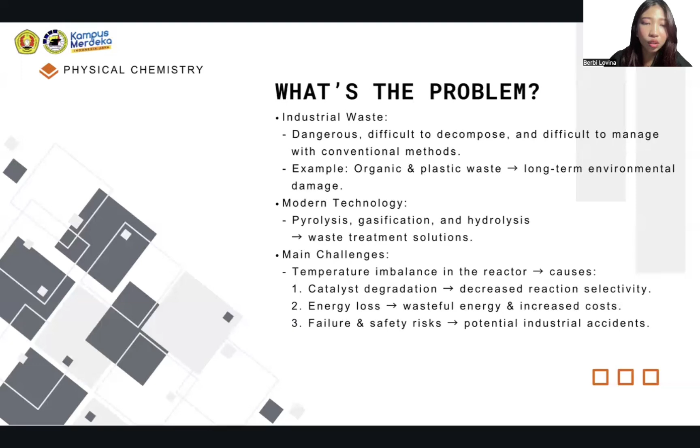So, what's the solution for this reason? A solution is needed that can not only maintain a sustainable temperature in the reactor, but also improve thermal efficiency and overall safety. The integrated thermal equilibrium tank reactor is an innovative solution designed to solve this problem. ITER combines smart material technology, IoT-based sensors, and thermal nanofluid to achieve thermal equilibrium actively and dynamically throughout the process. This system enables even heat distribution throughout the reactor tank, reducing the risk of hotspots, improving energy efficiency, and extending catalyst life.

In addition, ITER is also designed to adapt to various types of industrial processes, from plastic waste treatment to biomass, making it a flexible solution for waste treatment in various industrial sectors. By utilizing the concept of thermal equilibrium, ITER has the potential to revolutionize industrial waste treatment and introduce more sustainable and efficient processes in reducing the environmental impact of industrial waste.

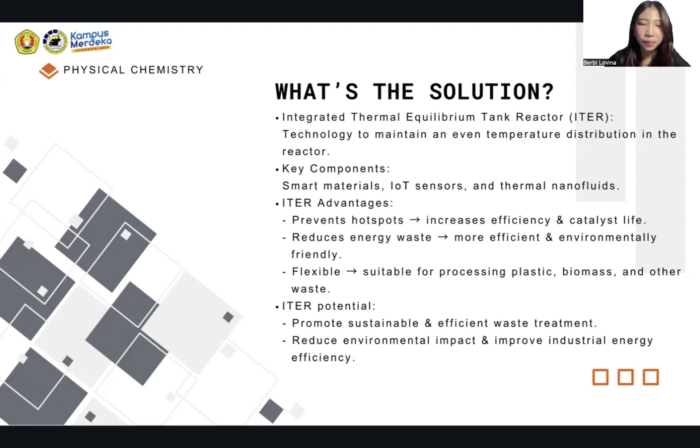Okay, next, the second chapter is technological revolution in waste treatment and temperature management.

Industrial waste treatment is an important process in maintaining environmental sustainability and preventing ecosystem pollution. Industrial waste can be categorized as solid, liquid, and gaseous waste generated from various sectors such as manufacturing, textile, plastic, and biomass. Along with industrial development, waste treatment technology continues to evolve to improve process efficiency and reduce negative impact on the environment.

Industrial waste treatment is an important process in maintaining environmental sustainability and preventing ecosystem pollution. Industrial waste can be categorized as liquid, solid, and gaseous waste generated from various sectors such as manufacturing, textile, plastic, and biomass. Along with industrial development, waste treatment technology continues to evolve to improve process efficiency and reduce negative impact on the environment. The main waste treatment technologies used involve pyrolysis, gasification, and hydrolysis.

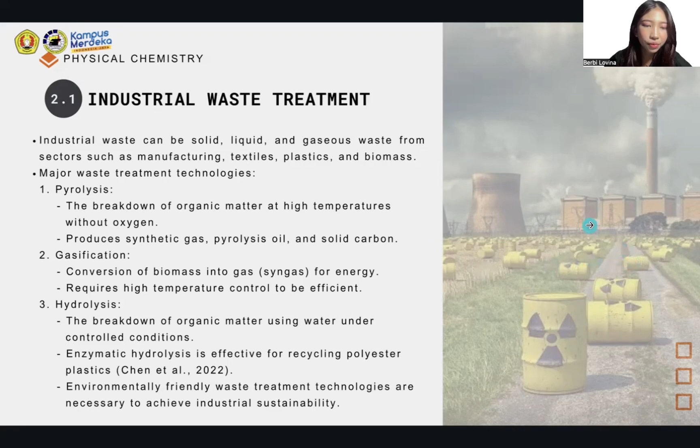Next, thermal equilibrium in chemical reactors. Thermal equilibrium in a chemical reactor is that in which the temperature distribution throughout the reactor system is uniform. Temperature imbalance, which often results in hotspots, can cause major problems such as energy wastage, catalyst degradation, and formation of unwanted byproducts.

Energy waste occurs when temperature imbalance results in inefficient use of energy to maintain the optimal temperature in the reaction process. Catalyst degradation, especially for temperature-sensitive catalysts, can impair reactor performance, decrease reaction efficiency, and increase maintenance costs. In addition, thermal imbalance can increase the risk of dangerous byproduct formation, such as solid carbon or toxic gases.

To address this challenge, smart material technology and sensor-based temperature control systems have been developed. Smart materials such as phase-change materials, or PCMs, are able to absorb and release heat efficiently, maintaining temperature stability in the reactor, while sensor-based temperature control systems allow for more even heat distribution, improving efficiency and temperature stability in chemical reactors.

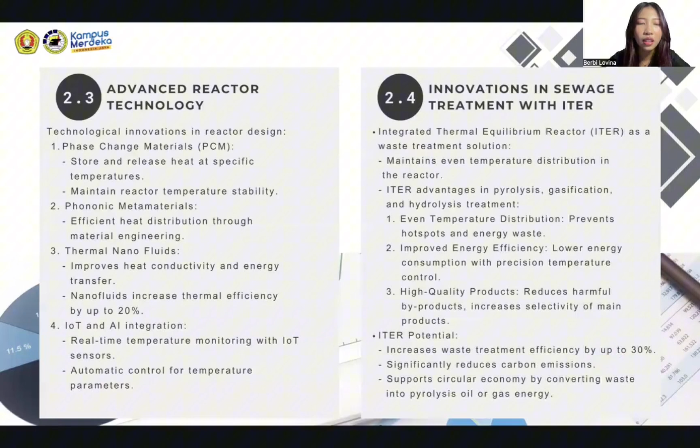In pyrolysis, gasification, and hydrolysis processes, ITER offers several significant advantages. These include even temperature distribution and high quality product output by minimizing the formation of harmful byproducts. With this innovation, ITER has the potential to reduce the environmental impact of industrial waste and help support industrial sustainability through more efficient and environmentally friendly processes.

Okay, the next chapter is ITER design and technology. The first basic concept of ITER.

ITER is a technology developed to address the challenge of temperature imbalance in chemical reactors, which often hamper process efficiency. ITER works to keep the temperature in the reactor uniform and stable, which is an important factor in improving the efficiency of industrial waste treatment.

To achieve this, ITER incorporates a variety of advanced components, including phase change material or PCM, aerogel, and thermal nanofluid. PCM plays a role in absorbing and releasing heat as the material undergoes a phase change, which enables temperature stabilization in the reactor. Meanwhile, aerogel is used for thermal insulation, reducing heat loss and improving heat distribution efficiency in the reactor system.

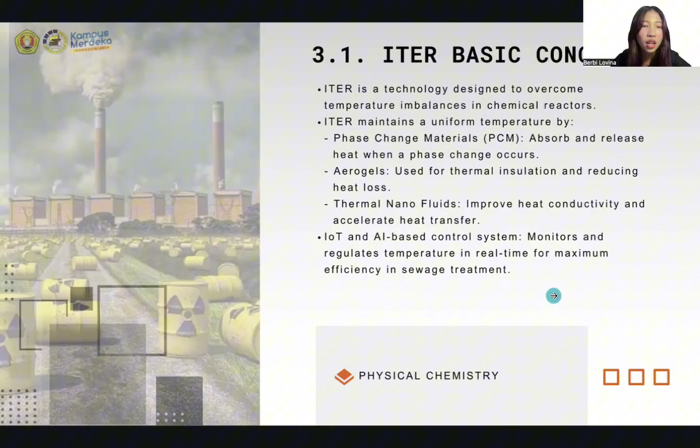In addition, ITER is equipped with an IoT and AI-based control system, which monitors and regulates temperature in real time for maximum efficiency in every waste treatment process.

Okay, the next main components of ITER. First, phase change material or PCM. PCM is used in ITER to absorb or release heat at a specific temperature, which helps keep the temperature stable in the reactor. While this material changes phase, either from solid to liquid or vice versa, thermal energy is absorbed or released, allowing temperature stabilization in the system.

Proper selection of the PCM is critical to the effectiveness of this system, as it must have a high energy storage capacity and can sustain temperatures suitable for the process being carried out.

And next, aerogel-based insulating material and phononic metamaterial. Aerogel is known as a material with excellent thermal insulation, which is used in ITER to reduce heat loss and improve heat distribution efficiency in the reactor. With very low thermal conductivity, aerogel helps keep the internal temperature of the reactor stable and controlled.

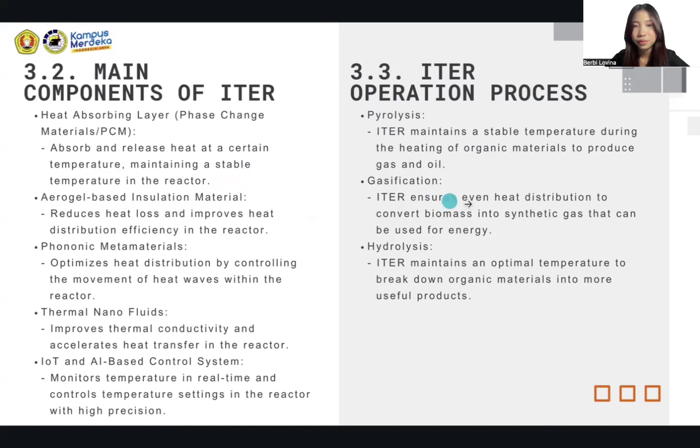And fourth, equations relating to industrial waste treatment using advanced reactor technology. In industrial waste treatment using advanced reactor technology, several physical and chemical formulas can be applied to ensure the efficiency and sustainability of the process.

One of these is Fourier's law for heat conduction, which describes the flow of heat through material in the reactor. This formula explains how heat flows based on temperature difference, material conductivity, and material thickness, which is critical in temperature management in the reactor for processes such as pyrolysis and gasification.

The formula is q equal minus k times A times dT divided dx. Q is heat flow rate, indicating how much heat flows through the material per unit time. K is thermal conductivity of the material, indicating the ability of the material to conduct heat. The minus sign indicates the direction of heat flow, namely from hotter areas to colder areas. A is the surface area exposed to heat flow, determining how much area is used to produce heat. And dt divided dx is the temperature gradient, the change in temperature per unit length along the material.

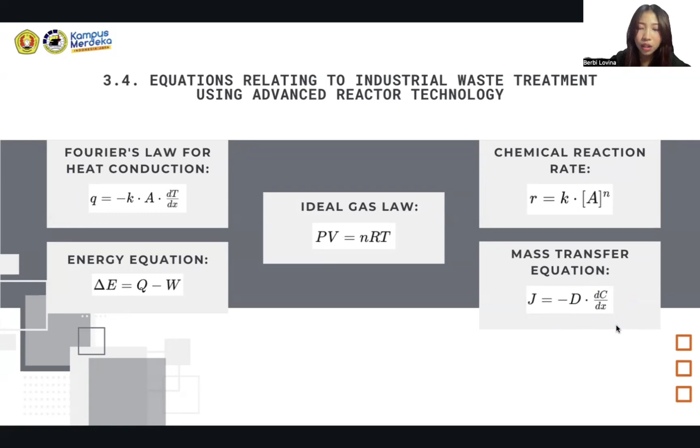And last, in the enzymatic hydrolysis process, which is used for recycling polyester plastic, the mass transfer equation can be used to model how chemicals such as water or enzymes move through the medium in the reactor. This mass flux plays an important role in determining the efficiency of the process and the speed of conversion of waste material into more useful product. All of these formulas work together to improve the efficiency and effectiveness of the sewage treatment process, while managing energy usage and temperature in the reactor. The formula is J equal minus D times dC divided dx. J is mass flux, which is the rate of mass flow through a unit area per unit time. D is the diffusion coefficient, showing how fast a substance moves or spreads in a medium. And dc divided dx is the concentration gradient, which is the change in concentration of a substance per unit length in the direction of flow.

Chapter 4 is advantages and applications of ITER.

The first advantage of ITER in industrial waste treatment: ITER, or integrated thermal equilibrium reactor, has a number of advantages that make it a revolutionary technology in industrial waste treatment. Some of the key advantages of ITER include, first, energy efficiency. ITER is designed to reduce energy waste by keeping the temperature in the reactor stable and even. With better temperature distribution, the system optimizes energy conversion, making the waste treatment process more efficient overall.

Second, byproduct reduction. One of the major challenges in industrial waste treatment is the formation of unwanted byproducts. ITER helps address this issue by precisely regulating the temperature, thereby reducing the formation of toxic gases or other dangerous waste, as well as increasing the quality of the main product produced.

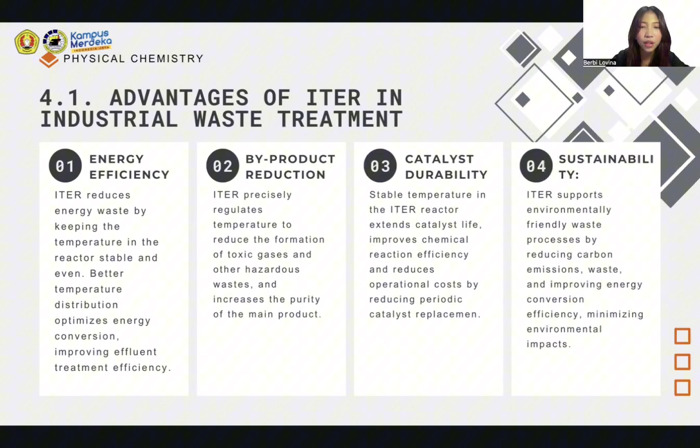Third, catalyst durability. Stable temperature in the ITER reactor can extend the life of the catalyst, which serves to accelerate chemical reactions and degrade over time. Better catalyst durability improves reaction efficiency and reduces the need for periodic catalyst replacement, which in turn reduces operation cost and waste. Lastly, sustainability. ITER supports greener waste treatment by reducing carbon emissions and the amount of waste generated. It contributes to a more sustainable industry by minimizing environmental impact through energy recovery and improved energy conversion efficiency.

4.2 ITER application in various industry. ITER can be applied in various industry sectors, providing more efficient and environmentally friendly solutions. Some of ITER's main applications include, first, plastic waste processing or pyrolysis. In the plastic pyrolysis process, ITER maintains the optimal temperature for the decomposition of plastic into higher quality products such as synthetic gas and processed oil. With more efficient temperature distribution, ITER produces energy and products with fewer unwanted byproducts.

Second, biomass gasification for energy production. ITER is used in biomass gasification, a process that converts biomass into synthetic gas or syngas, which can be used to produce renewable energy, with a precise temperature control system. ITER can improve the efficiency of renewable energy production by reducing energy waste and greenhouse gas emissions.

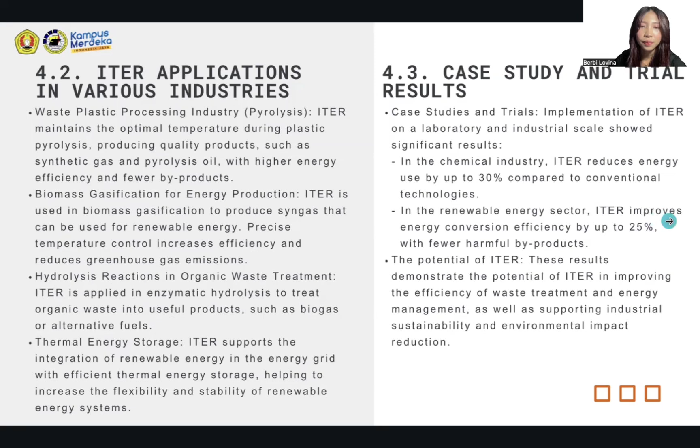Chapter 5 is ITER challenges and implementation. 5.1 Challenges in ITER implementation. While ITER offers great benefits, its implementation faces some major challenges. One of them is the cost of the advanced materials needed to build ITER, such as superconductors, which are very expensive. This leads to high construction and operation costs.

Another challenge is the complexity of the system that needs to be integrated with existing industrial processes. The complex system in ITER must be designed to be compatible with existing infrastructure, which requires careful engineering and special attention to reliability and efficiency. In addition, ITER also requires further research to test and validate the performance under real industry conditions, especially to test the durability of the materials and their effectiveness in waste treatment.

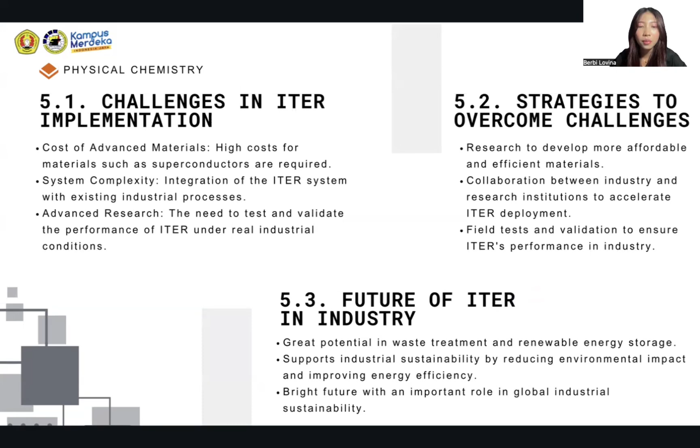And 5.3 Future of ITER in industry. The future of ITER is bright, especially with its potential to be applied in various industry sectors. ITER has great potential for more efficient waste treatment and renewable energy storage. It will also play an important role in supporting industrial sustainability by reducing carbon emissions and improving energy efficiency. In the long run, ITER could be the technology that changes the way industry manages energy and waste, resulting in a more sustainable and environmentally friendly industry.

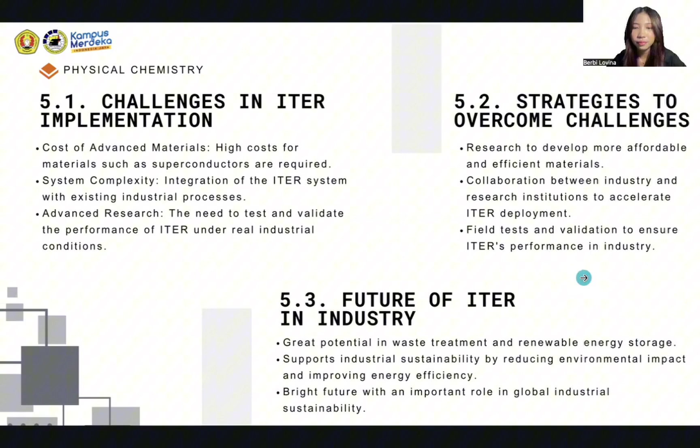Chapter 6 is ITER comparison and impact analysis. 6.1 Comparison of ITER with conventional technology.

So the first, from the energy efficiency aspect, ITER demonstrates higher energy efficiency than conventional technologies. In the process of treating industrial waste, ITER can maintain a stable and even temperature in the reactor, which allows for more optimal energy conversion. This is in contrast to conventional technology that often faces energy waste due to uncontrolled temperature fluctuation.

The second, the operating cost aspect. So although the initial cost of implementing ITER is higher, the technology has advantages in the long run. With higher energy efficiency and better catalyst durability, operation costs can be reduced. ITER reduces the need for periodic catalyst replacement, which reduces maintenance and operating costs compared to conventional systems.

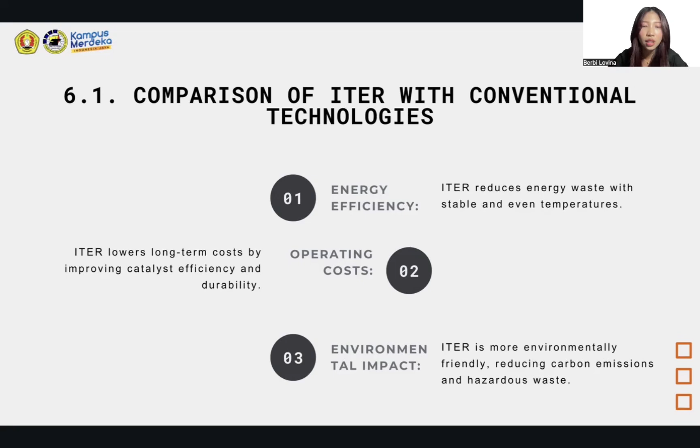6.2 ITER's potential to support a circular economy. For the first, transformation of waste into valuable products: ITER provides great potential in transforming waste into high value products with high energy conversion efficiency and reduced production of unwanted byproducts. Industrial waste can be transformed into useful raw material or renewable energy.

And next, reduced dependence on new natural resources. ITER technology contributes to the reduction of dependence on new natural resources by maximizing the utilization of waste and resources. By using waste as feedstock, ITER helps reduce the exploitation of increasingly limited new natural resources.

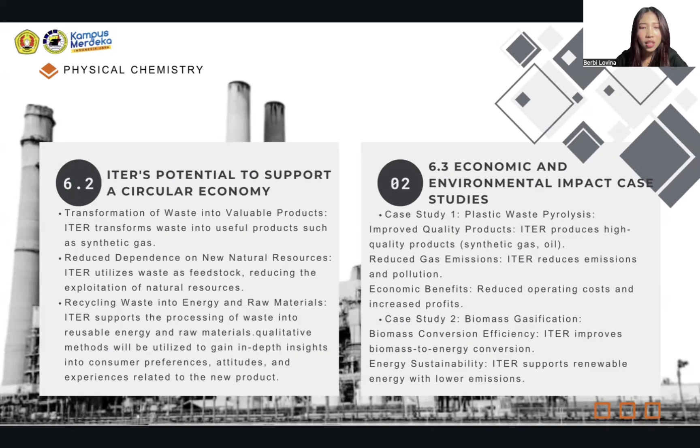And the next chapter is conclusion and suggestion. Okay, the last chapter is conclusion and suggestion. So the conclusion of this topic is that industrial waste treatment requires advanced and environmentally friendly technology. ITER, or integrated thermal equilibrium reactor, emerges as a solution by maintaining stable temperature inside the reactor, improving energy efficiency, reducing waste, and producing quality products while reducing environmental impact.

ITER can be applied in waste plastic treatment, biomass gasification, and organic waste hydrolysis, despite cost and integration challenges with existing systems. ITER has the potential to reduce long-term operation costs and environmental impact compared to conventional technology. ITER supports a circular economy by converting waste into high-value products, reducing dependence on natural resources, and recycling waste into energy or feedstock.